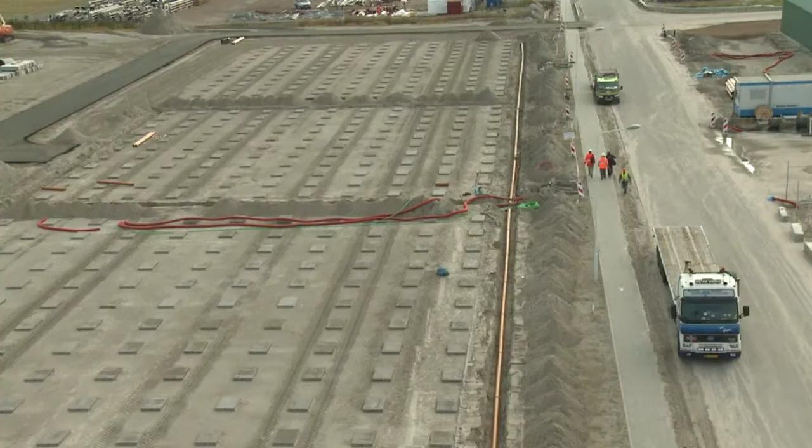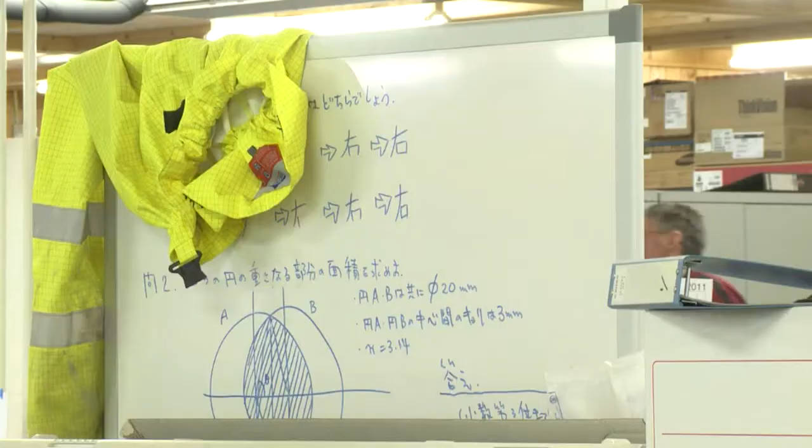I see Ballast Nedam not only as a pure construction company but also as a service provider. Because Ballast Nedam already knows the Mitsubishi way of thinking, that's why we feel that Ballast Nedam is much closer to Mitsubishi compared with other European companies.

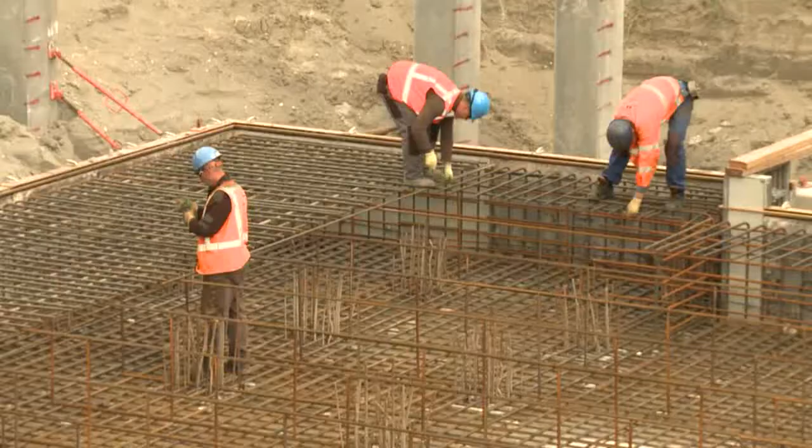We discuss a lot of things in a nice way with each other, so you intend to solve problems quickly, and really enjoy that.

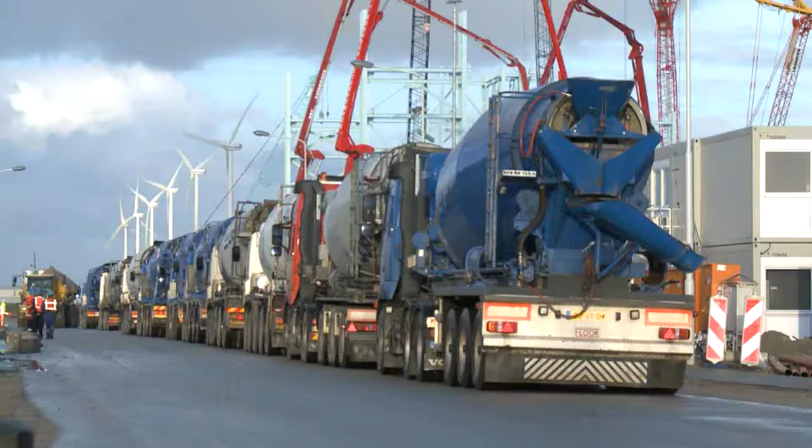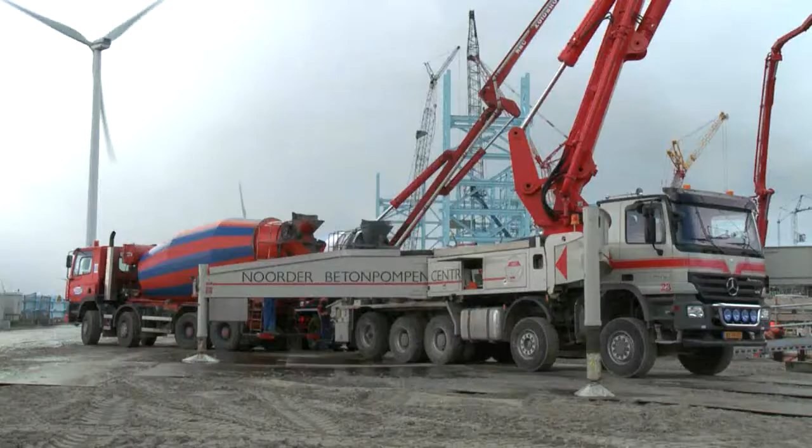We work with a limited amount of subcontractors because most of the disciplines we have in-company. That means we have a long time relationship with all our people. We can train them in safety awareness and project management skills, and they form the basis for a successful project.

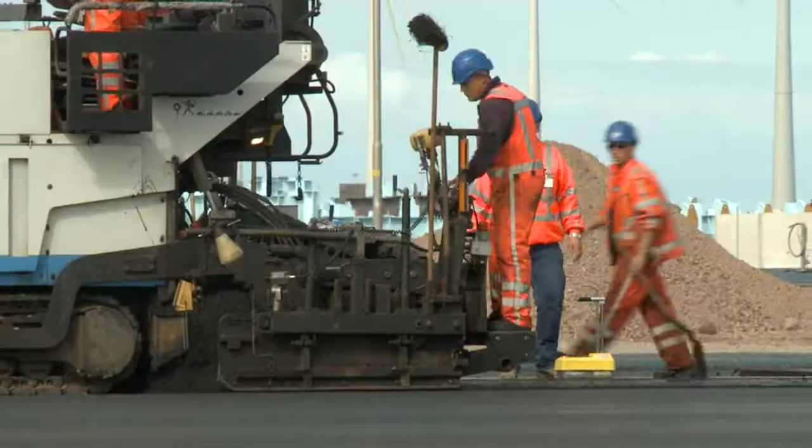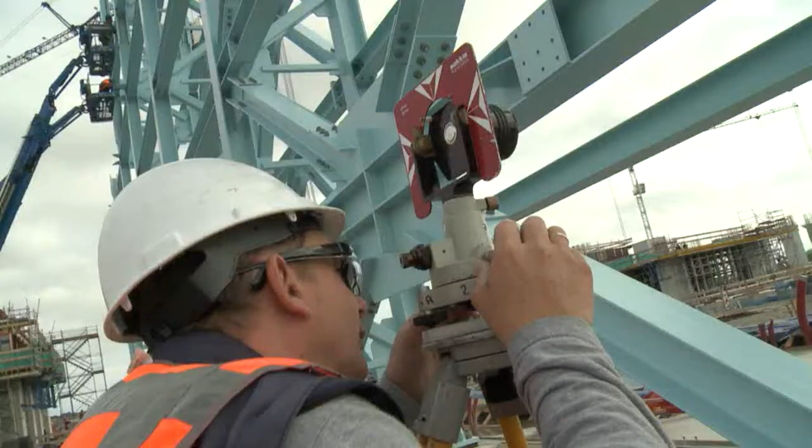Our goal is to have a satisfied client. If the client's not satisfied, we don't have a satisfied project.

Ballast Nedam is especially strong in cooling water systems. We have a very particular situation here, that we are very near to a nature protected area, and Ballast Nedam was thinking together with us about the solutions for this system.

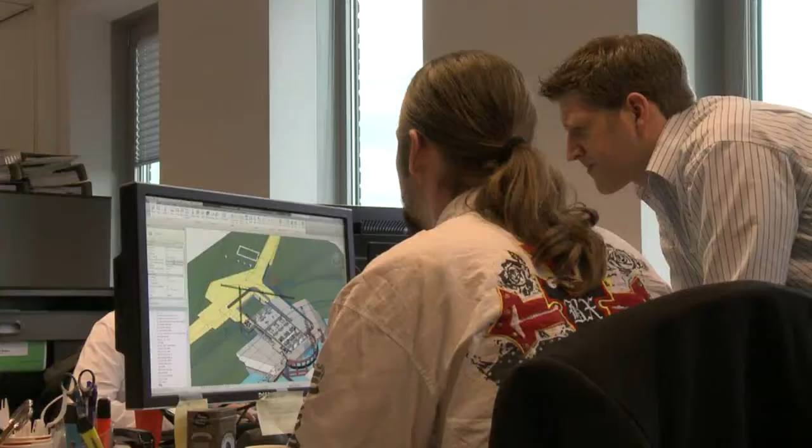All of the design works are carried out in cooperation with our client Mitsubishi. These works consist of the cooling water intake, the cooling water outflow, and the design works for the cooling water piping.

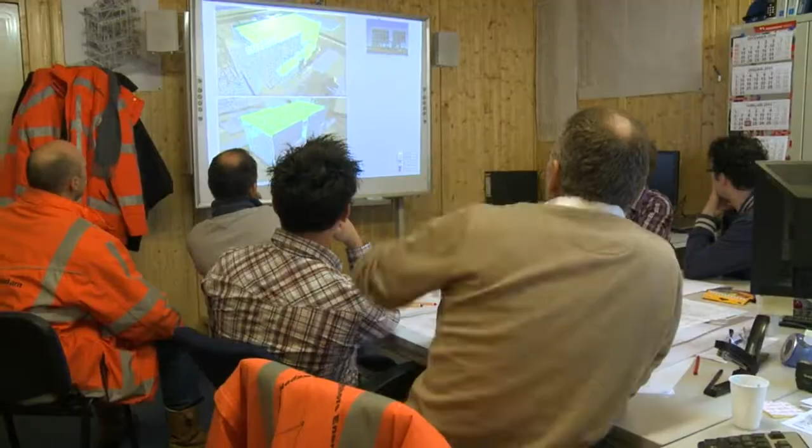We combined our schedule with the 3D model. You see that here, so we have the 3D model of the complete project. And we connected our schedule to the 3D model, so you get a 4D model, or a BIM model, building information model. Then you get a kind of movie for the complete building project.

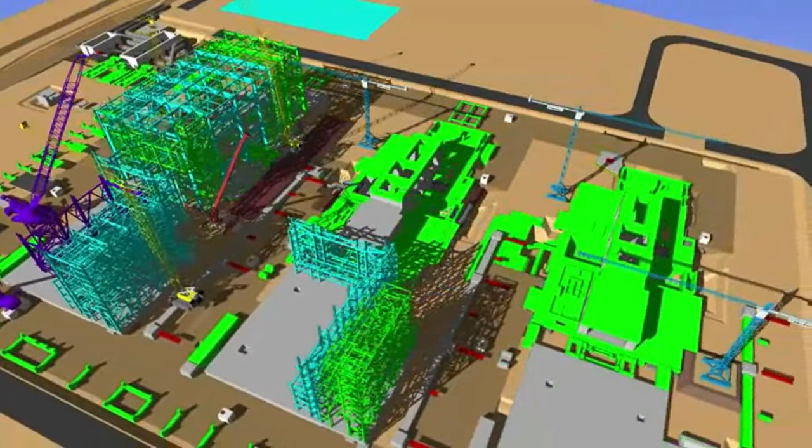So if the schedule gets modified, our simulation is also modified. Now you can see who is working where, at what place.

Well, I think it's the experience of Ballast Nedam to keep the planning. They know how long things last.

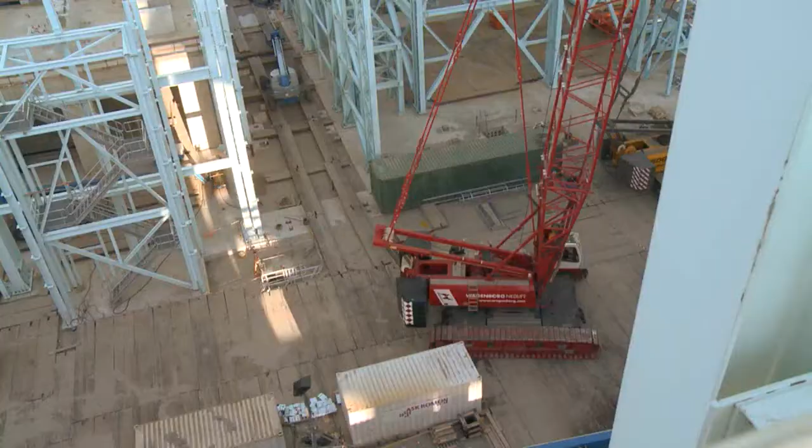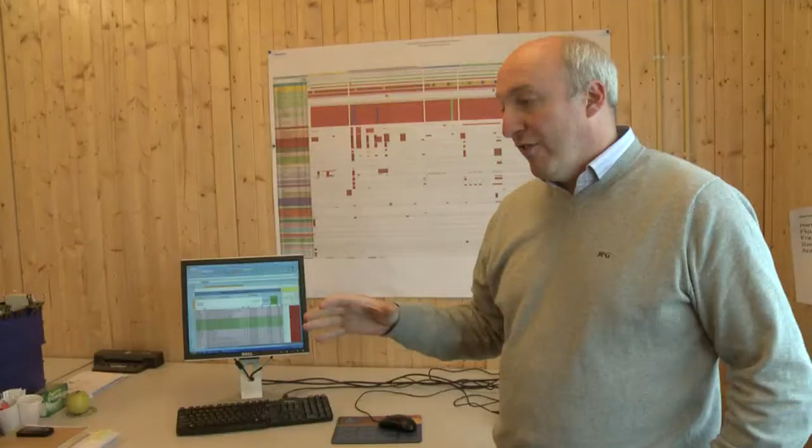So it's my responsibility to make sure that every aspect of the job gets remeasured in a coordinated, controlled and standard way and format. My personal goal is really to make sure that all the works on site are transferred from the drawings into these small baby packages, so everything's clear, so that we can present it to the client and the contractor and hopefully get everything agreed.

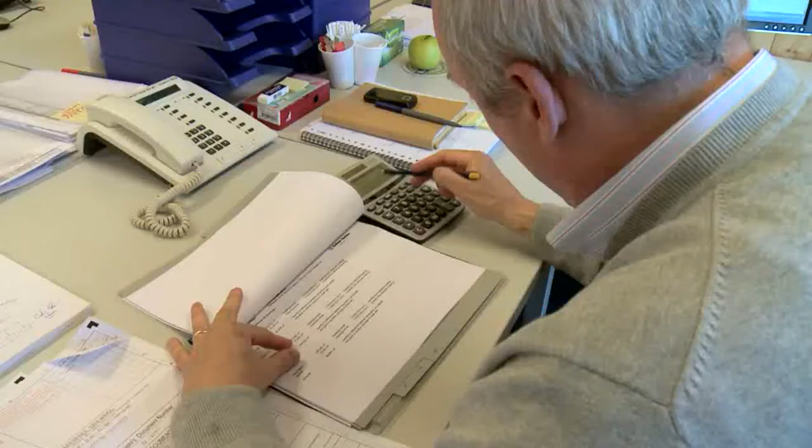Overall, we have around 400 or 500 individual packages. Those people are capable and know what they are talking about. Of course, price is always a discussion, but that is typical for a project like this.

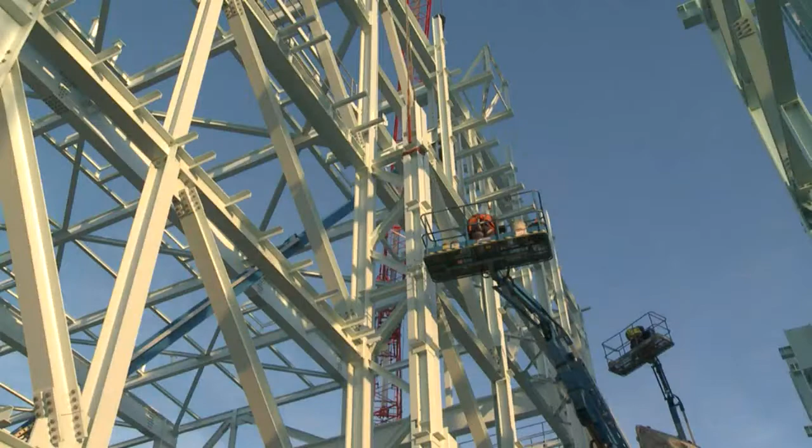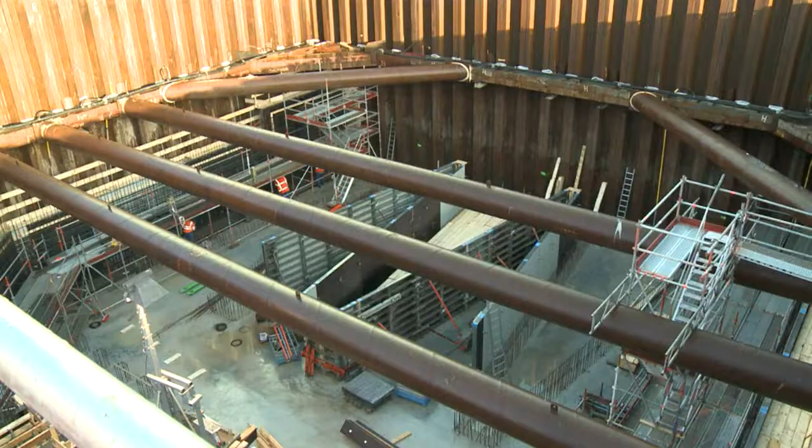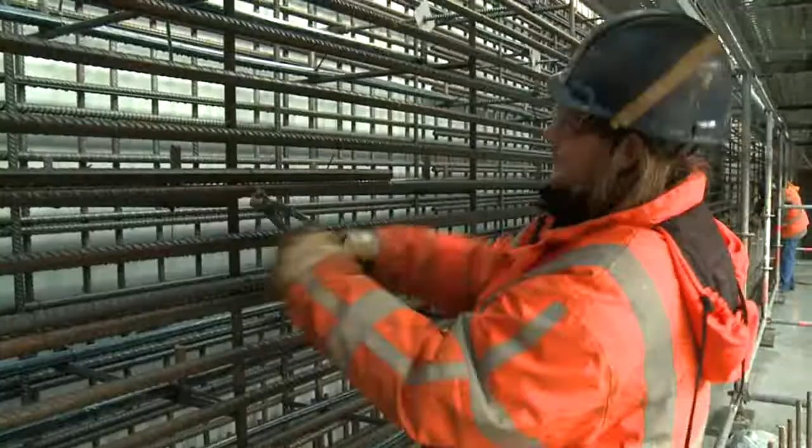A very difficult item in this project was the cooling water outlet, because the water flows into the Waddenzee, which is a protected nature area. So we wanted to have a very compact cooling water outlet. We had to work together with all kinds of parties to discuss how the cooling water outlet should look, and Ballast Nedam was a facilitating, service-providing partner in that.

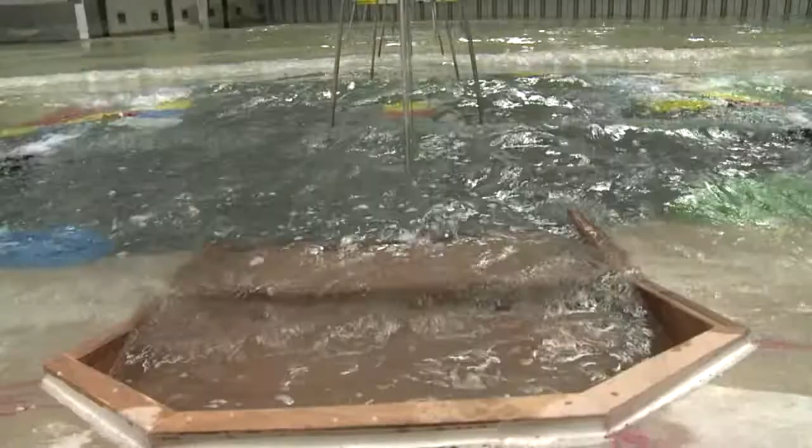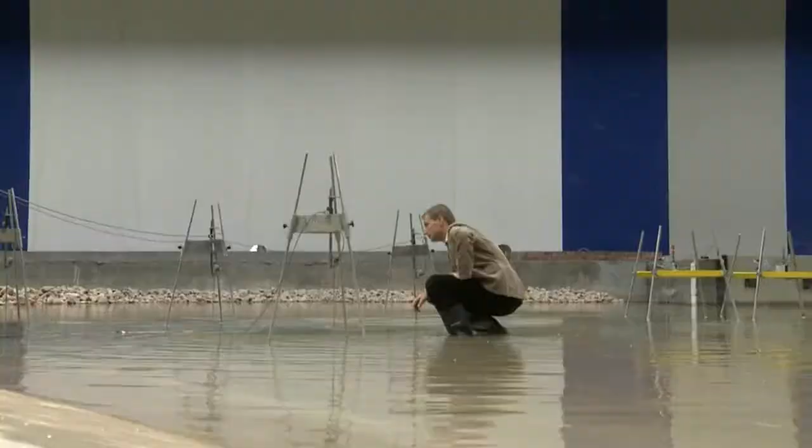Ballast Nedam Engineering works together with Deltares to design the cooling water outfall for the Magnum power plant. We model this setup here to determine whether the structure is stable and can withstand a certain design storm. We will measure the waves and also measure the damage, which is the goal.

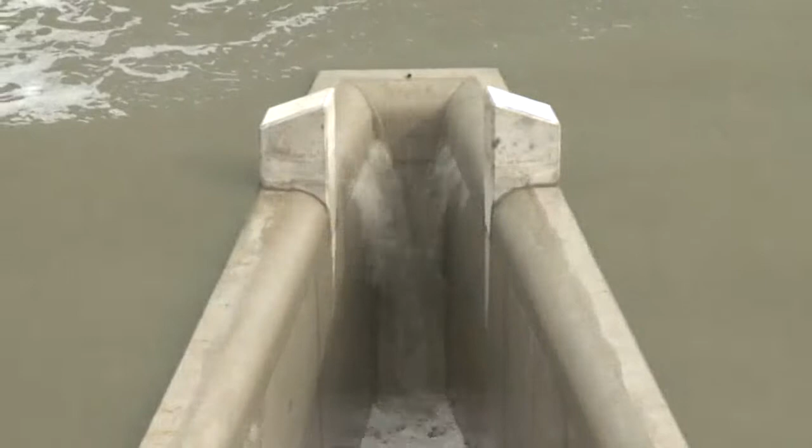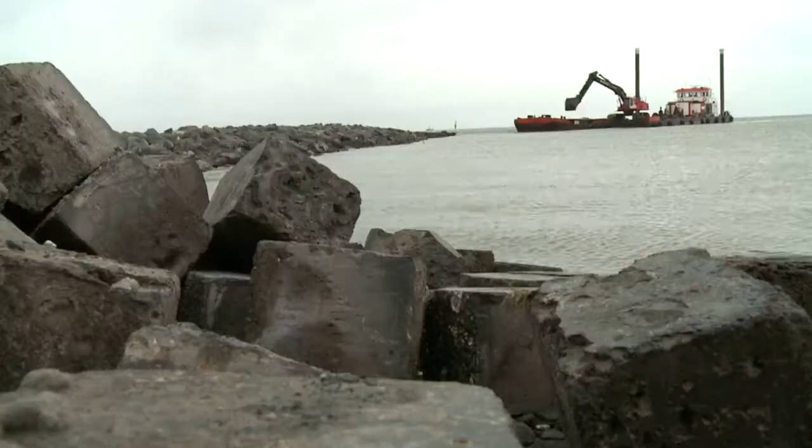We have the W-shaped walls here, so it can flow nice and easy into the Waddenzee. My personal goal is a clean understanding between execution departments and the engineering departments.

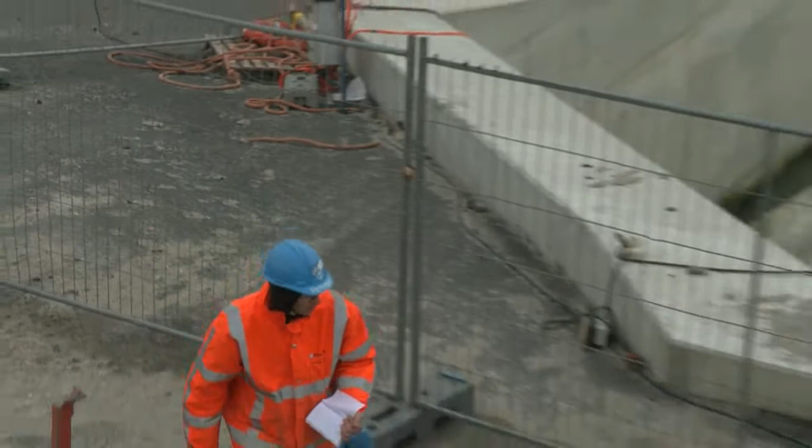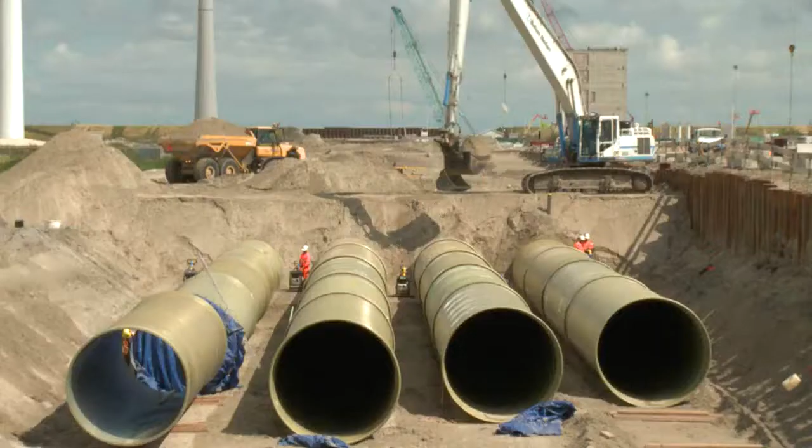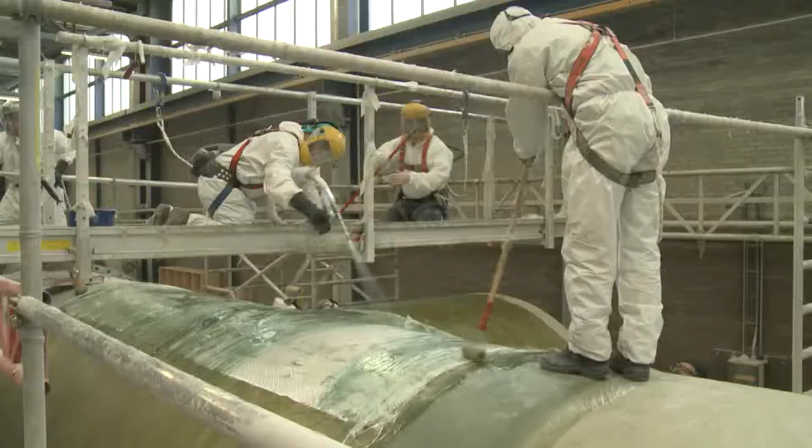Well, this GRP pipeline is the main cooling water line for the Nuon power plant. As you can see, the pipe is made out of glass fiber reinforced polyester. We do the basic engineering and detailed engineering of the GRP line, while Ballast Nedam does the engineering of the installation, so we work very closely together in the field of engineering.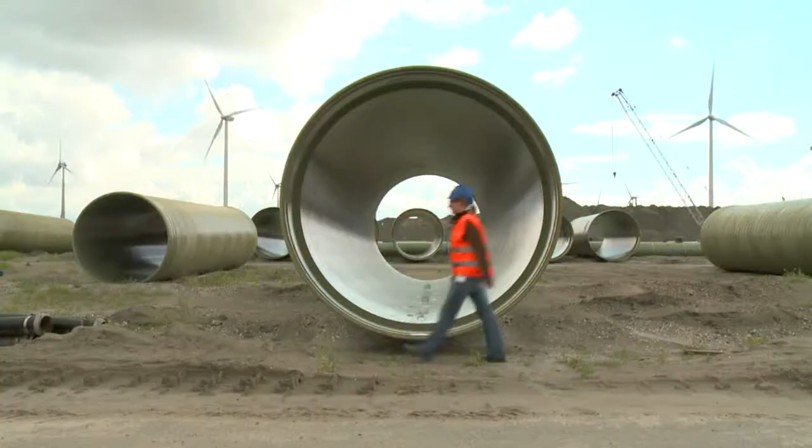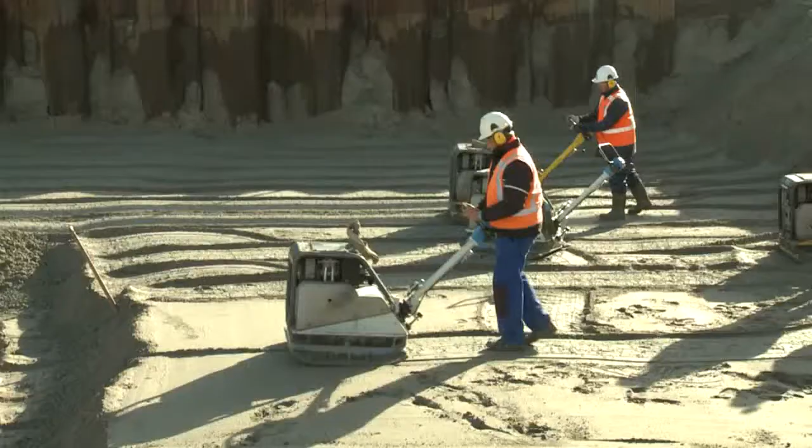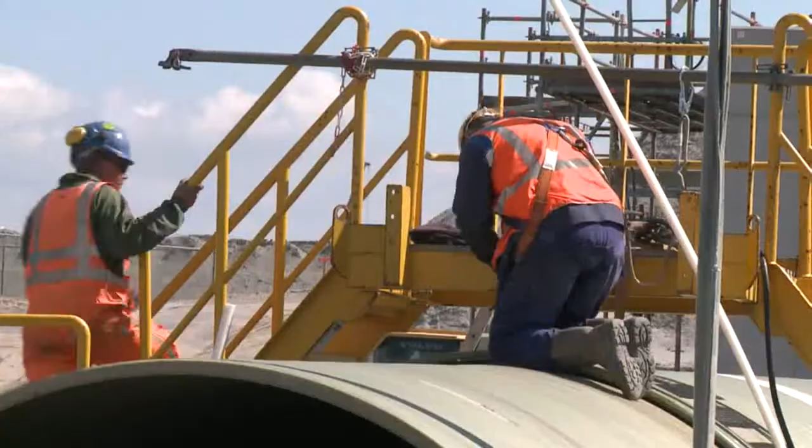Talking about the quality aspects dedicated to the GRP piping, it's very important to have the backfilling done by proper compaction. The thickness of the layer is about 30 centimeters, which is quite a lot of work for us, given 4 or 5 kilometers of length in total. This pipeline has to be hydro tested and pressure tested, and this is done by Ballast Nedam, also in cooperation with us.

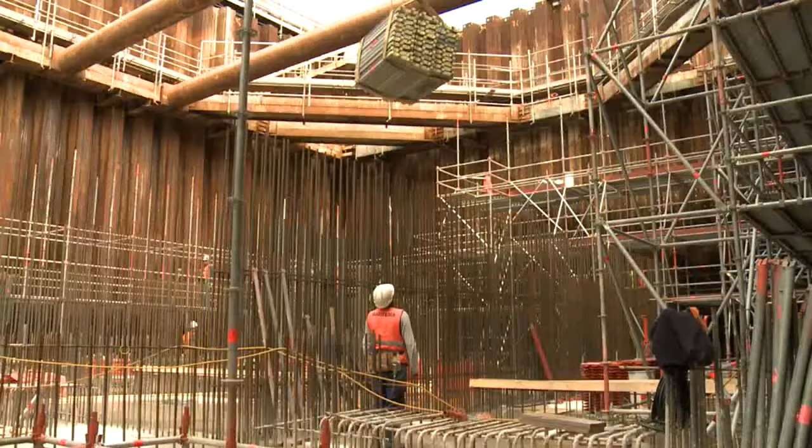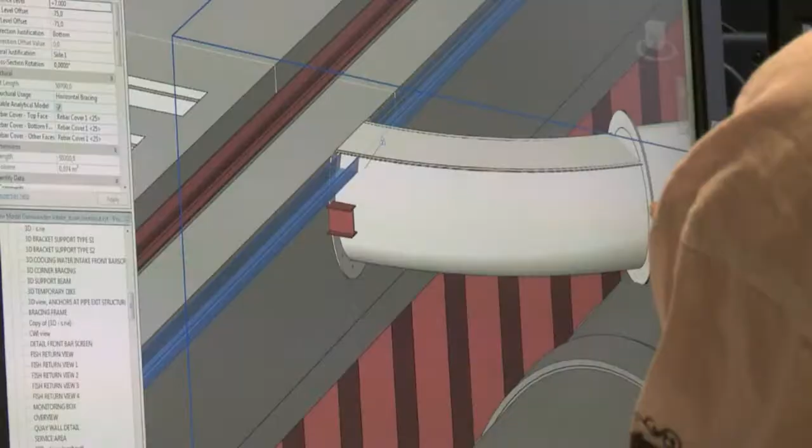Building which will take in the water which is required for the cooling. In the intake building itself there will be a lot of other systems which will take out the debris. There will also be a fish return system, that's some sort of a band screen which will take out the fish, and it will take care that they re-enter the water safely.

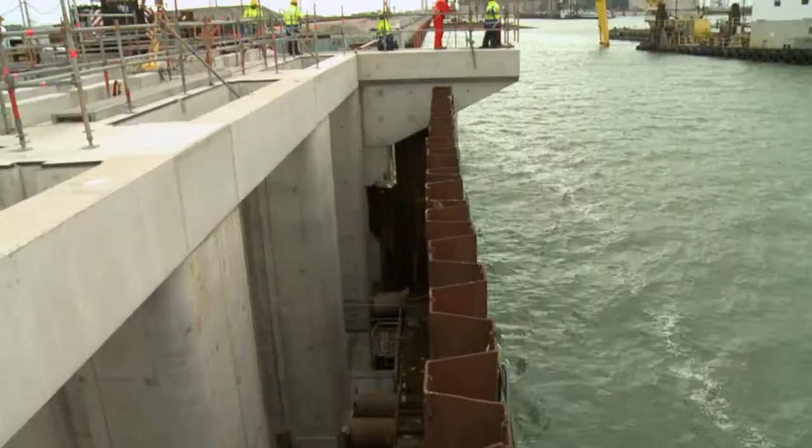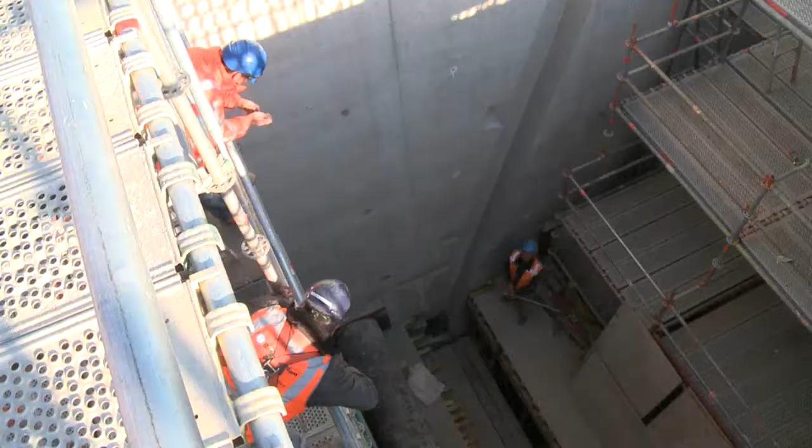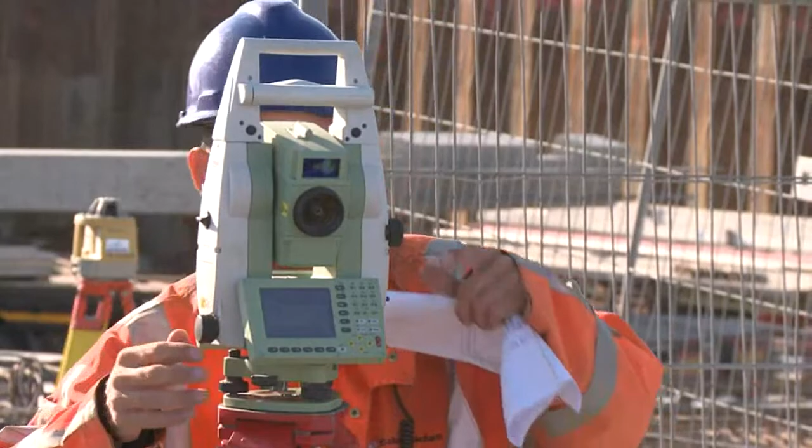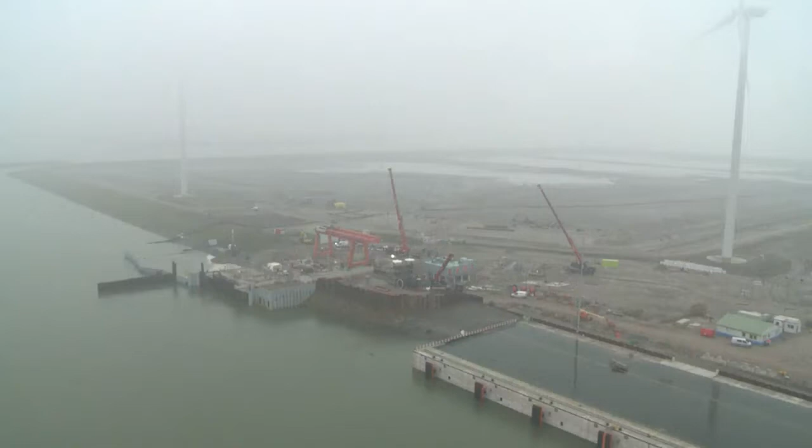One of the additional items we had to deal with, and also Ballast Nedam had to deal with, was at the cooling water inlet. We had damage there caused by a third party, and that damage would totally destroy our commissioning schedule. So we had to go for an interim solution, which gave us a very big profit in the schedule. If we had insisted on the final solution, we would have had a delay of 3 months. Through the thinking of the Nuon team and the Ballast team, we found an interim solution which only caused a delay of 1 month.

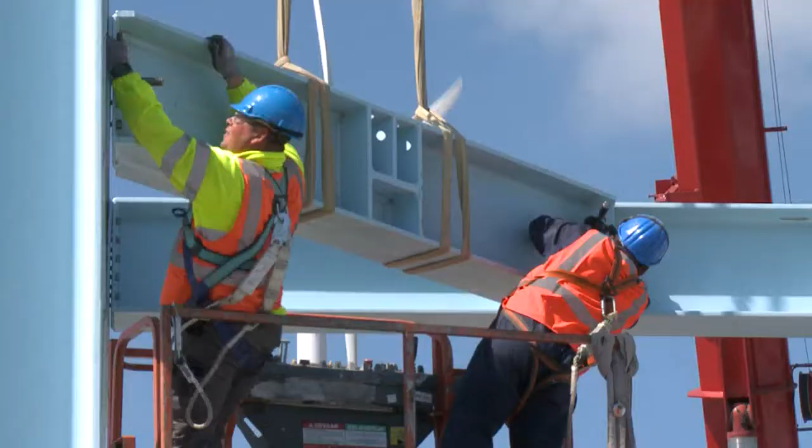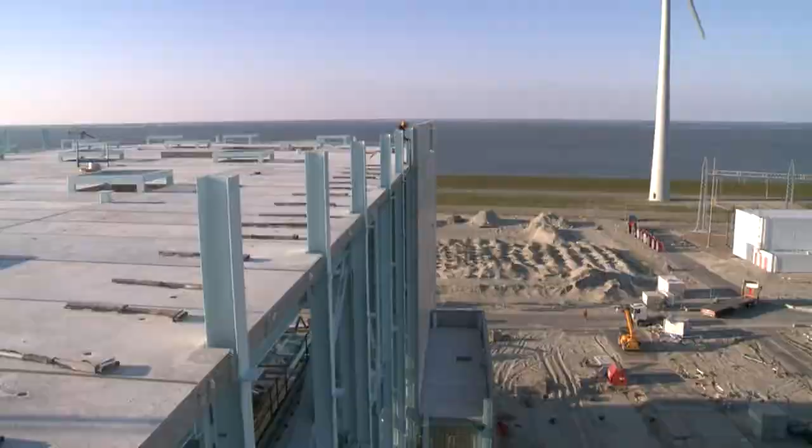Well, safety is always important, of course, because we all want all workers to go back home safely and not get injured or hurt in any way. The chance of fatalities is there. We live with safety all day, that's our job.

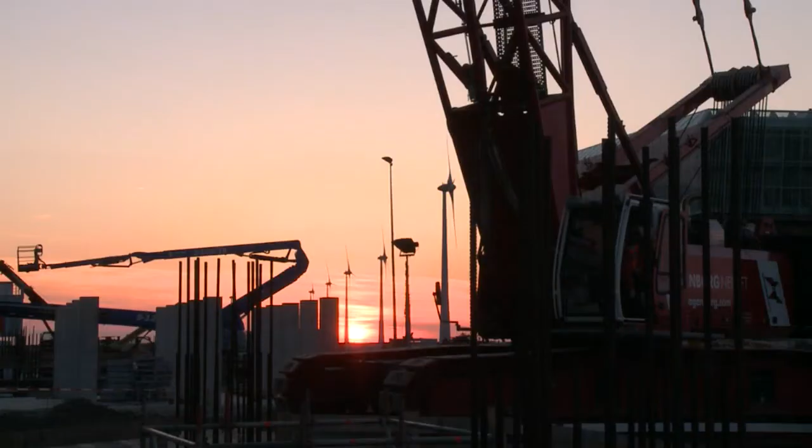The roof sheets are to be installed during the night hours. This is because of the safety during the daytime. We have a lot of workers underneath the roof, so it is very dangerous to work above those workers.

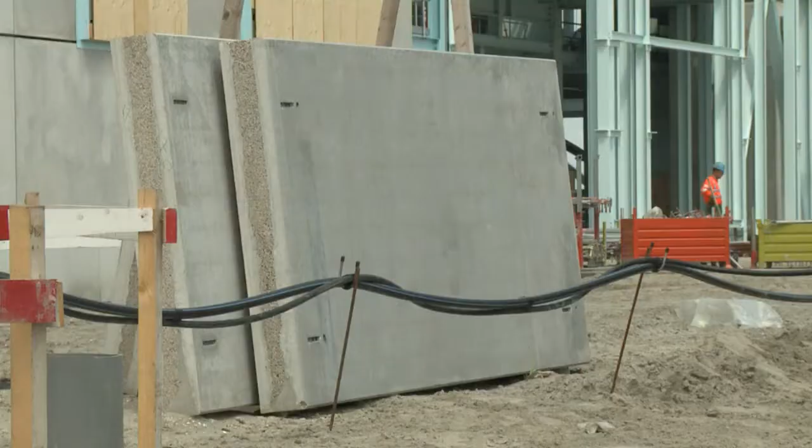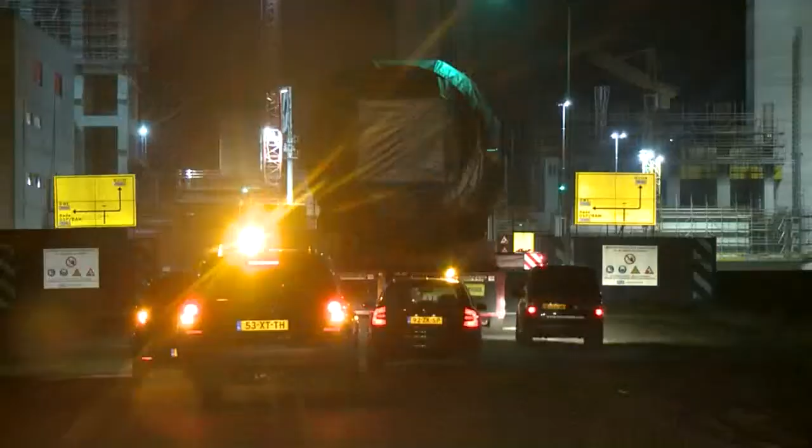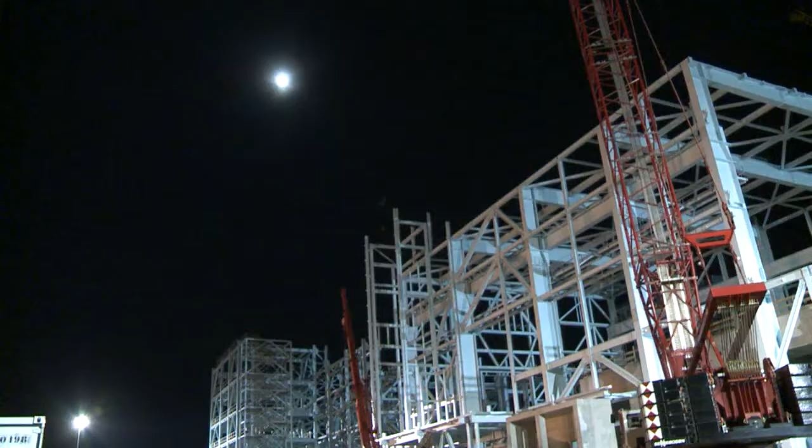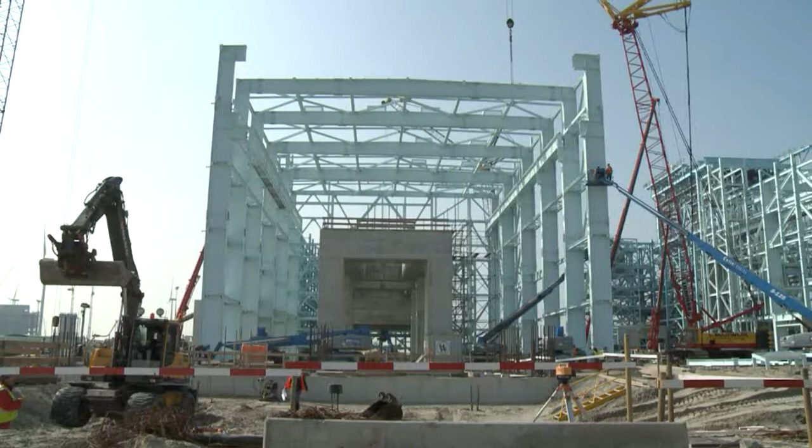The turbine is resting on the concrete table. Talking about the concrete table, that is a very accurate piece of concrete which has tolerances more close to the mechanical world rather than the civil world. We have a lot of controls and checks and a lot of extra people involved for measurements, accuracy, the anchor bolts, the holes, the conduits, and all kinds of installed steel metals.

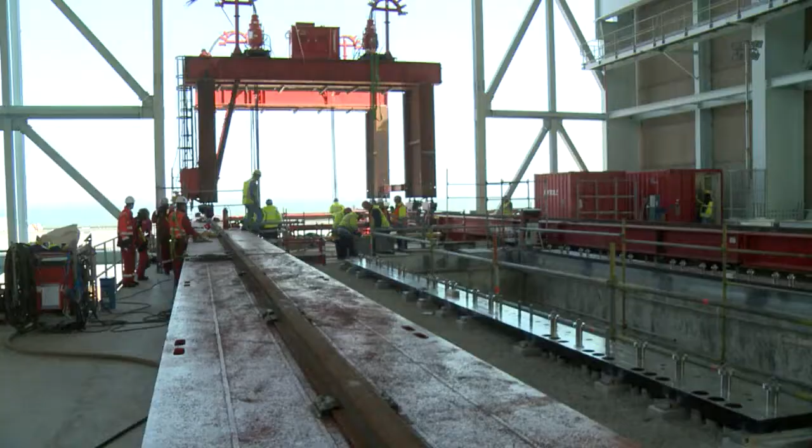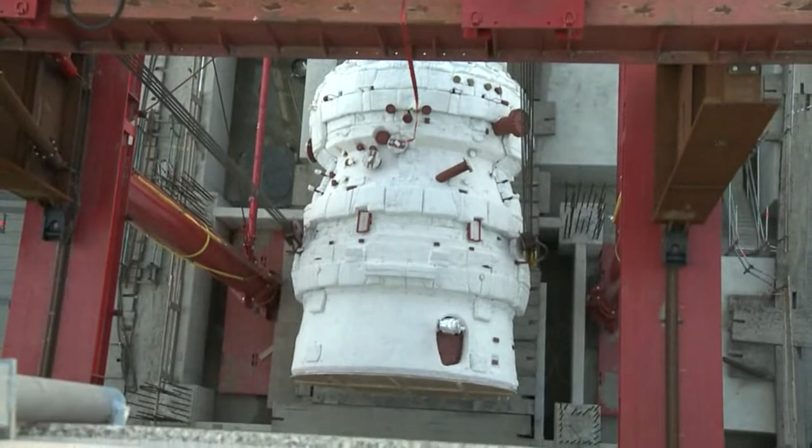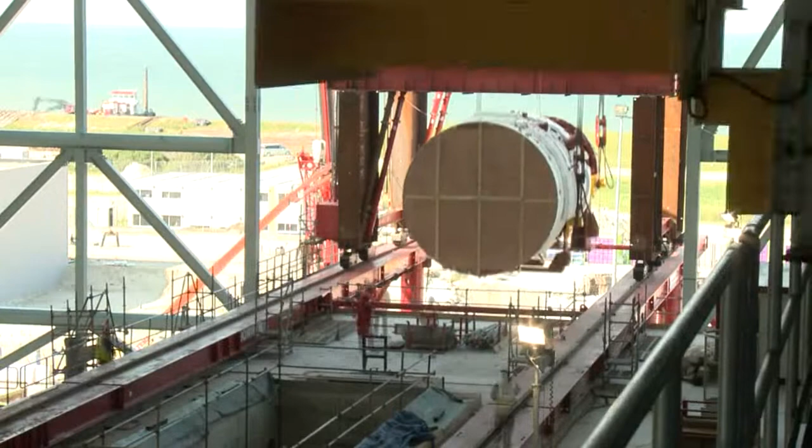The turbine is not lifted on top. The turbine is sliding on a horizontal skid coming down from the outside world inside the building itself.

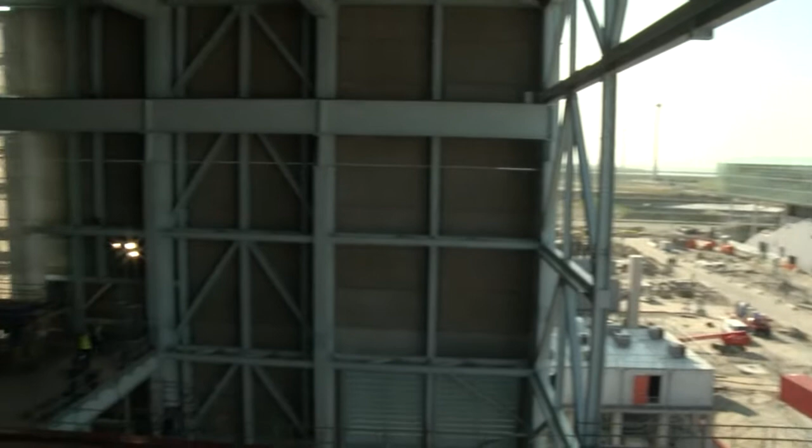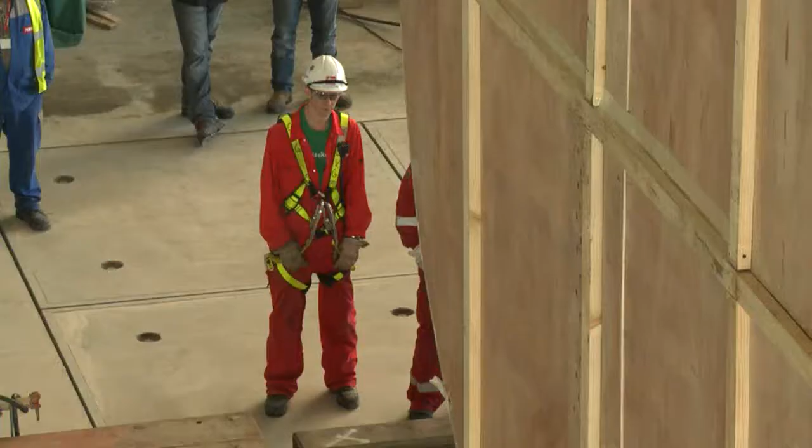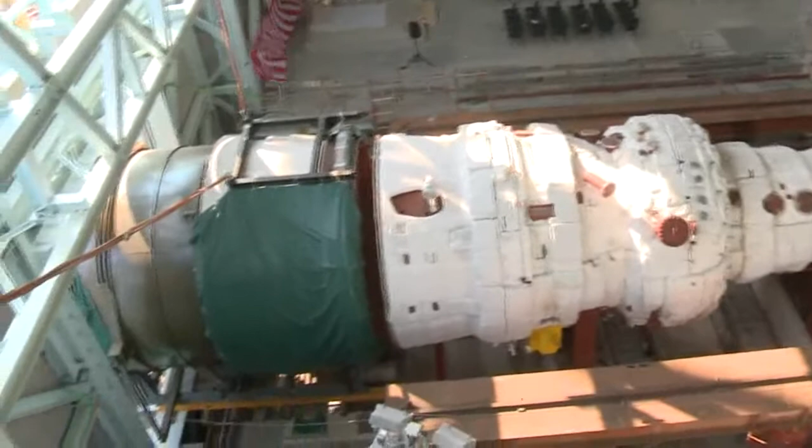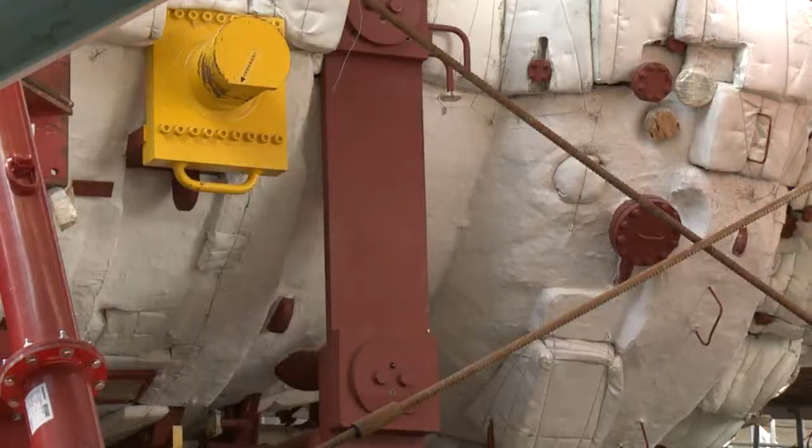Of course, Mitsubishi is a manufacturer of turbines, so for us the installation of the turbine is one of the major milestone dates for the power plant construction. It was in April we successfully installed the first turbine, so that's why we arranged our Japanese style, so-called Shinto style ceremony, which we used to do in Japan, and I really wanted to introduce in this country.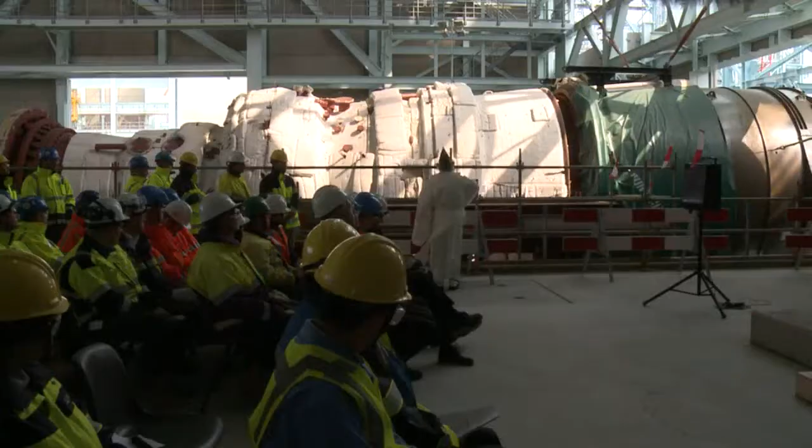It is extremely difficult to work with each other because of the mentality and culture. For that reason, we adopt cultural training courses here on site with all staff members. Anyway, installation of the turbine is just a starting point for us to start the mechanical work, so the meaning of that ceremony is to wish for the safe execution of the following work.

We have to know there is a difference. Then, based on this understanding, we have to find some solution. Okay, so that is what I learned in this project, I have to work this way. I understand it is very important to understand each other because, as a fact, the way of thinking is a little bit different between the Japanese and the European people.

I believe that schedule-wise and quality-wise, we are satisfied with Ballast Nedam. When we look at the civil part, we are about 95% ready. It looks good, and you can see clearly now that the mechanical and electrical contractors have taken over site. We are reducing staff now, and we will come back at the end of the project to do the finishing works.